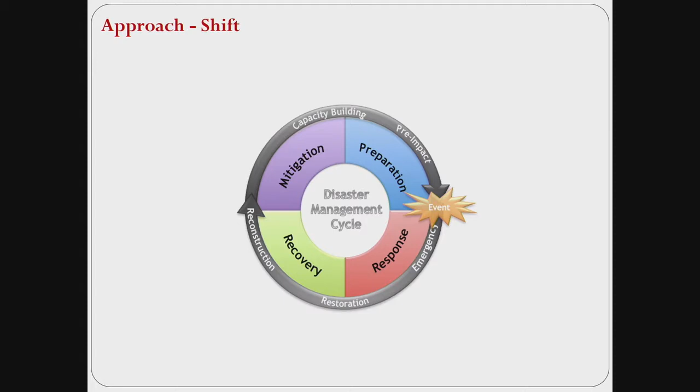Recent approaches to disaster risk management start with mitigation and preparation before an event happens. What can we do to limit the hazard from happening? Can we try to prevent it? Can we try to reduce the magnitude? If not, what mitigation measures may we need to put in place to minimize or lessen the impact from that particular disaster? It could be systems, training, prevention methods, and a whole lot of different tools at our disposal.

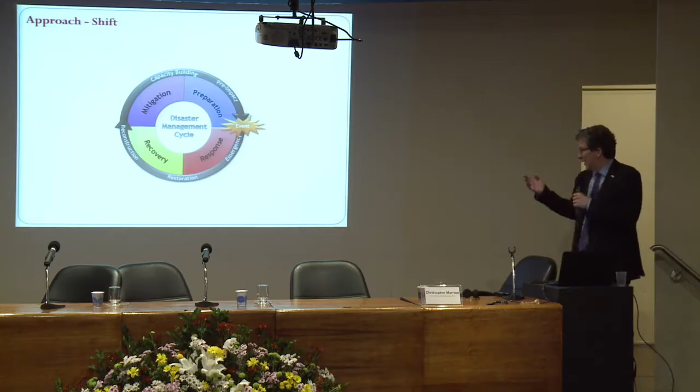We then move forward to having an event, which could be on the order of seconds, minutes, hours, or days. Following that is a response period, where we're looking to fully address the particular event that has happened, and then eventually, once we're finished with the response, we move into recovery and repairing and building back. It's a cyclical, iterative process.

Over the last several years, the industry has been moving more within this diagram. A lot in the past was more on response and recovery. We're now pushing into trying to deal with disasters beforehand, and focusing much more on prevention and mitigation, for many, many reasons.

From there, looking a little bit deeper, we have what we'd call a risk-informed, performance-based approach. It's helping us understand what it is we're trying to achieve, what are the hazards and issues we need to deal with, and then coming up with measures that hopefully allow us to achieve what it is we really want to achieve at the end of the day.

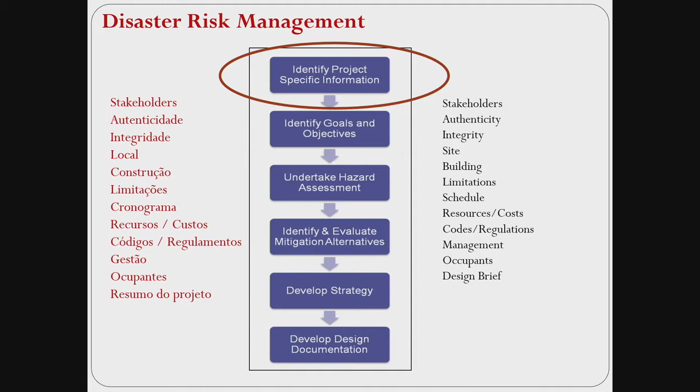Quickly walking through this — you may be familiar with a lot of it — starting out with the project: where we're at, what we're trying to do, who are the stakeholders, what are the different resources, what are our limitations, basically laying the groundwork for the overall project.

The next is our goals and objectives. What are we trying to do? Some are very high level: protecting the life of the occupants, of the people in the building and within the community, protecting the lives of the emergency responders and allowing them to get into the buildings and perform the operations they need to safely.

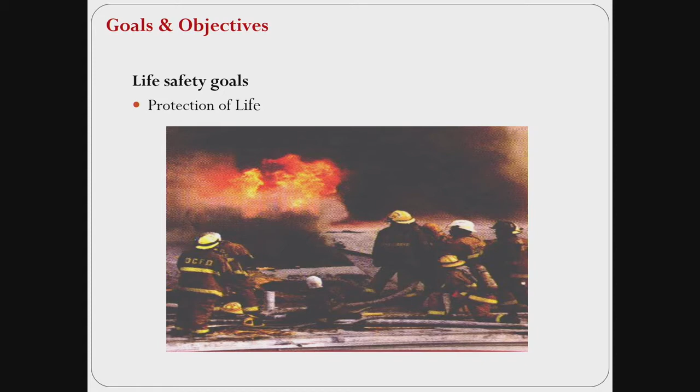But then we also look at other goals and objectives in terms of protecting the heritage, the overall structure, and protecting the contents. It's not just saying we want to protect this and have no damage, because there's obviously a relationship with how much money that would cost to protect it and ensure there's absolutely no damage. So it becomes kind of a balance.

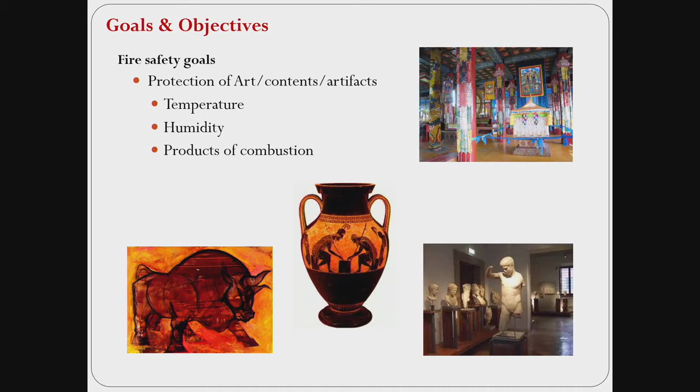It's important to start to quantify some of these things — how much damage, what type of damage is going to be acceptable to us and to the different stakeholders. That may vary. But for instance, just taking art...

Some art may be more susceptible to higher temperatures or humidities for extended periods of time. Some of the products of combustion, things produced during a fire, are acidic, and if they get onto paintings or electronic materials, they can have short-term and long-term impacts.

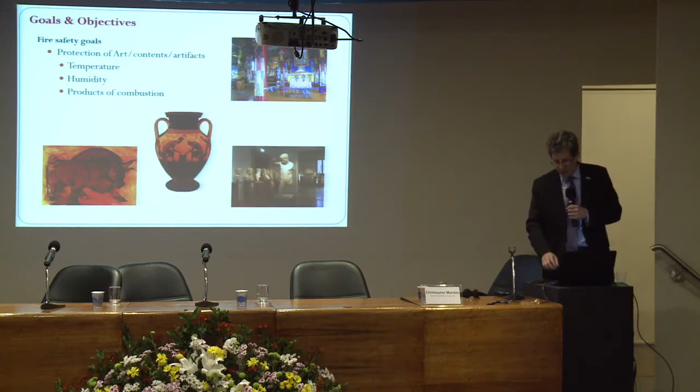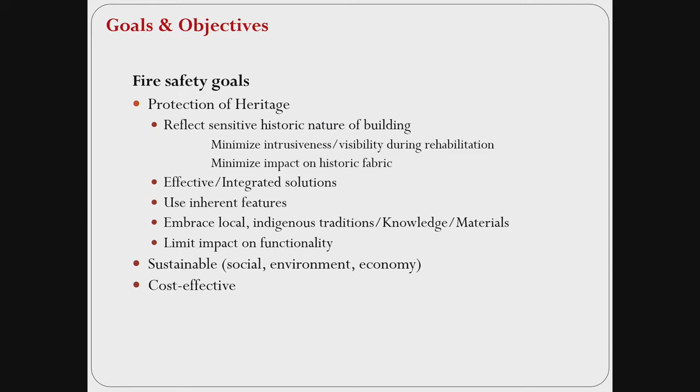So it's just understanding what we're trying to achieve and getting into a little bit more level of detail as we move forward. Then looking at mitigation and prevention measures, to what degree do we want them to impact the structure while they're being installed? What about the aesthetic looks of having smoke detectors in the room? Are there other options so we don't have those obviously sticking out in a very ornate ceiling?

But understanding some of these things are important early on as we go forward. From there, looking at credible events. Is it just fire? Are there other types of disasters and hazards that we need to be dealing with? Sometimes yes, sometimes no. Sometimes we may have earthquakes that then have fires following them, so we may have multiple events that we need to be addressing.

From there, we then look at fires. We talked about statistics earlier, and it's very important to look at and understand where we have been in the past and how that helps inform us going forward. You had seen before some of these showing up in statistics from electrical and open flames and cooking and those types of things.

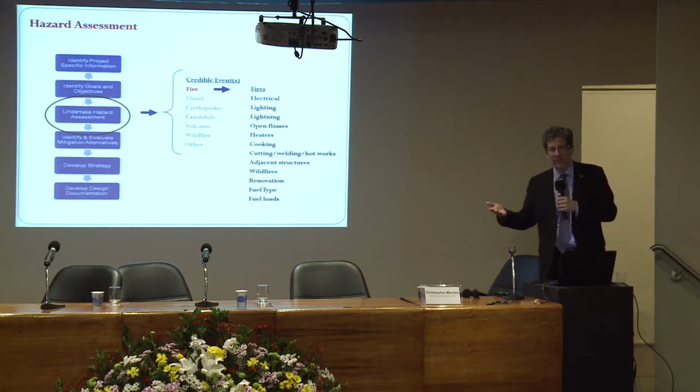But it's going through and understanding what there is in the building. It's not to say we can't have open flames in a church. It's more about understanding what we have, how much of a hazard that is, how do we then go about making that safe if that's what the functionality is and the operation of that facility, how do we go about helping protect it and make it safe?

From there, once we understand what we're trying to do and where we're trying to go, how do we end up getting there and looking at prevention and mitigation measures? This is looking at a balance between a fire and trying to limit it from happening and how big it can grow and how quickly. If we can't make it 100% that we're not going to have a fire, let's try to limit its size, and knowing that we can't have an absolute zero probability, looking at mitigation measures.

We often have a number of different things that we can do to compartment and contain the fire so it doesn't get large. Having detection so that we can alert people and the emergency responders, and so forth. Egress in terms of suppression. So it doesn't mean we need to be doing everything. It's really looking at the individual building and tailoring the solutions to the hazard and what we have as a building on an individual basis.

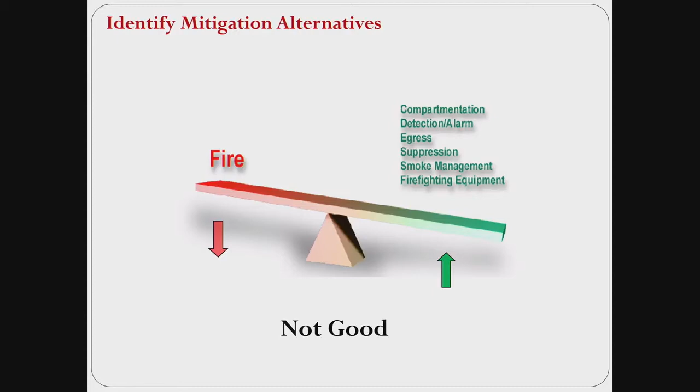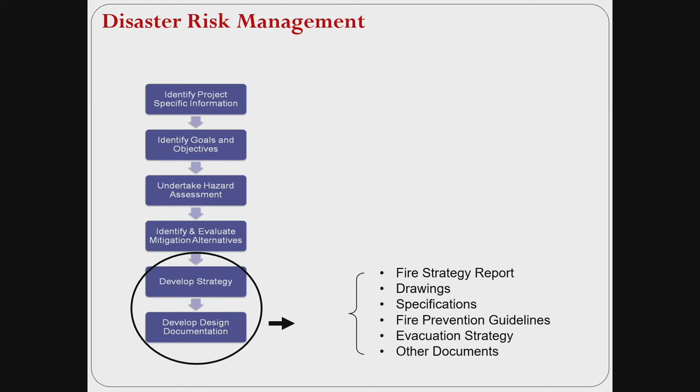So that obviously is good and not so good in terms of having a large fire and not so much protection there. From there, once that is in place, getting into design documents and working with the architects and engineers and local authorities in terms of moving forward and implementing the restoration or construction work.

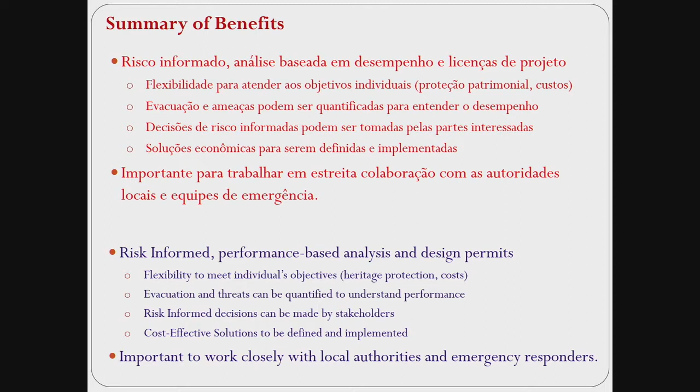There's just a couple of things quickly in terms of this process, in terms of some of the value it brings, is flexibility and being able to hopefully quantify to a better degree are we able to really achieve the objectives that we think we are, and that helps to make decisions that are more informed. Is this really going to work? Should we be spending our money here, or is it going to be better value to put money in other different mitigation measures?

Obviously, helping people be able to get out and understanding different threats, bomb threats, other types of natural disasters, not just fire. Are the evacuation systems able to get people out? And then obviously looking at cost-effective solutions, and with limited resources that we often have, is this the best way to be investing those resources?

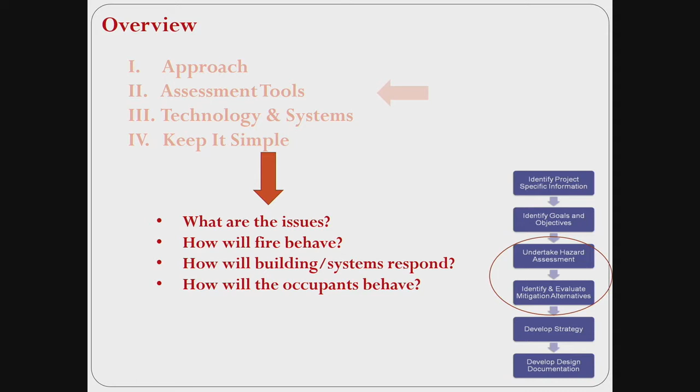Assessment tools. So we have the structure, then looking at what are the issues, how will fire behave, how will the building respond, how will the occupants behave.

So what are we trying to do? A fire starts, what do we need to do? We need to detect it, we need to notify the occupants, we need to notify the emergency responders. They need to respond, and then they can begin to put the fire out.

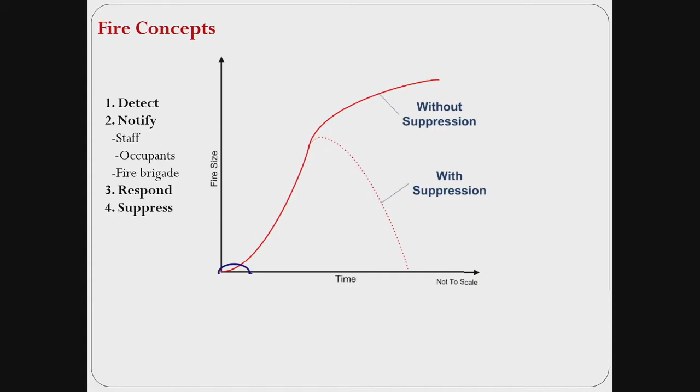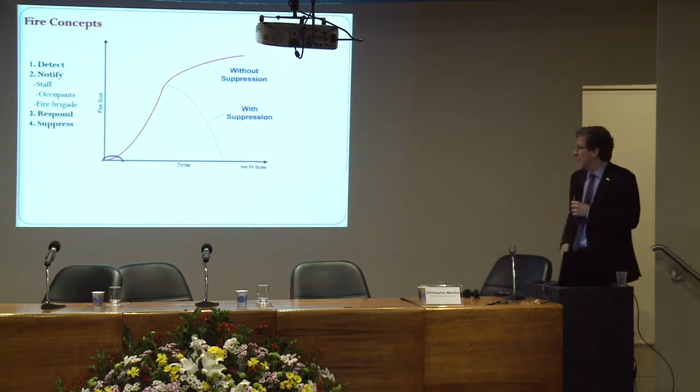But as you can see by how quickly fires grow, every second, every minute really counts, because the fire is growing so rapidly. So the more delay in terms of not having any kind of detection system, if we're not then processing that signal and sending it to the fire department very early on, if they have trouble in traffic getting to the site, if there's a gate around our facility, if there's locks, you can see that time continues and the fire grows and doesn't wait for the fire service to get there and to start putting water on the fire.

So everything we can do, just keep in mind, it's very time-based. Are we reducing that time frame, or are we allowing that to potentially increase? And how can we help enhance that reduction?

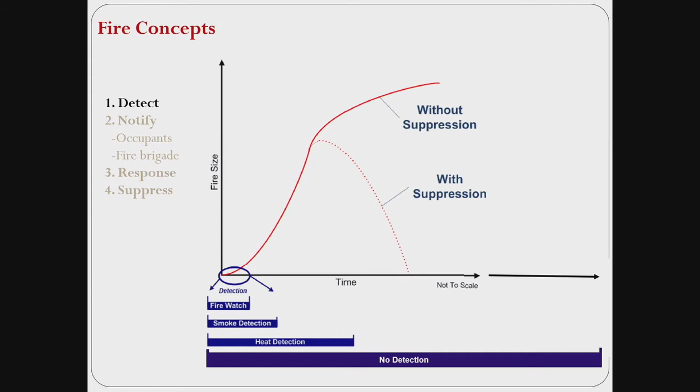Putting in different types of detection systems, from having a human there to see it, to smell it, obviously very good, but quite expensive. Putting in smoke detectors are better than heat detectors, and you can see, obviously, smaller size fires can be detected by those means.

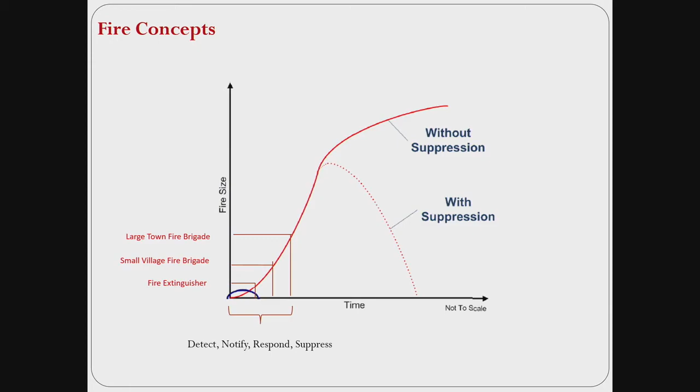One of the other things I thought is important too, just to understand in developing strategies, is that fire is based on physics and science. We're producing heat, and then you put water on the fire, and the water is actually absorbing the heat. So the more heat you absorb, the fire gets smaller and eventually extinguishes, which means, again going back to physics, if you have so much heat being produced, there's a quantity of water that will put that out, as long as it's effectively applied into the fire.

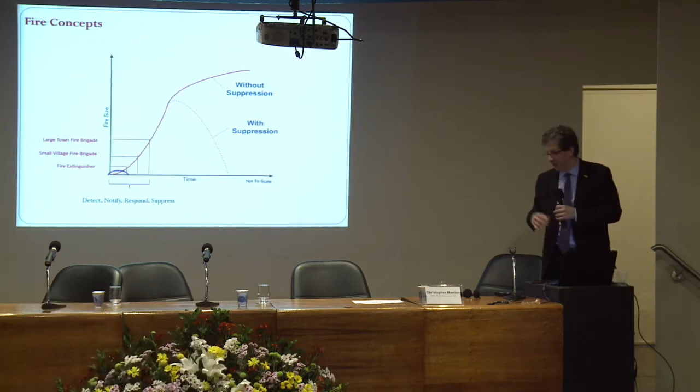But then looking at this, if you have a small fire extinguisher, it's a relatively small fire you can put out. If it's a small rural town with a limited fire department, that could get a little bit larger fire, and then getting into more of a city context, you can get even a larger fire from there.

There's a lot of work going on in terms of new technology, in terms of looking at human behavior and how people respond during emergencies. It's important to understand. We heard earlier today about different extinguishing agents. There's been reports out looking at different extinguishing agents on different types of materials. It's very interesting to note.

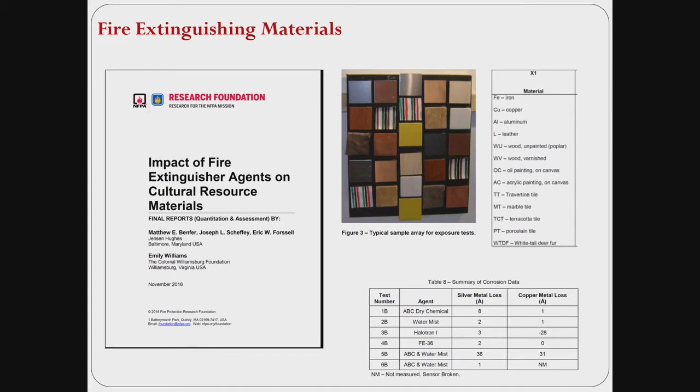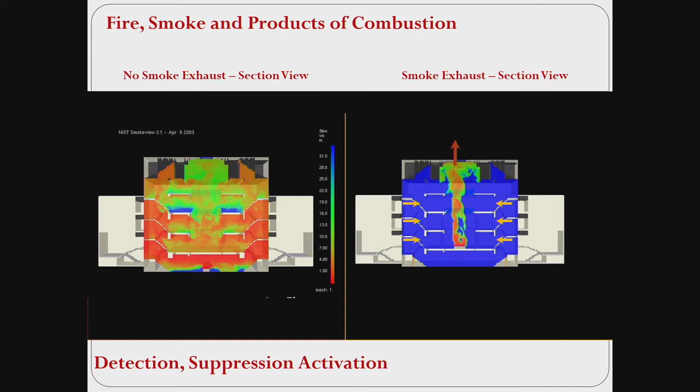A lot is happening in terms of computer modeling, looking at evacuating and how long it takes people to get out, looking at where we may have congestion. Looking at fire and smoke behavior and how that grows and develops, and if we have mitigation measures, how that may impact the movement of fire and smoke, and being able to predict when detectors may operate or when sprinklers may operate. Looking at the behavior of structures in fire and how long the building may stand or types of damage that may happen.

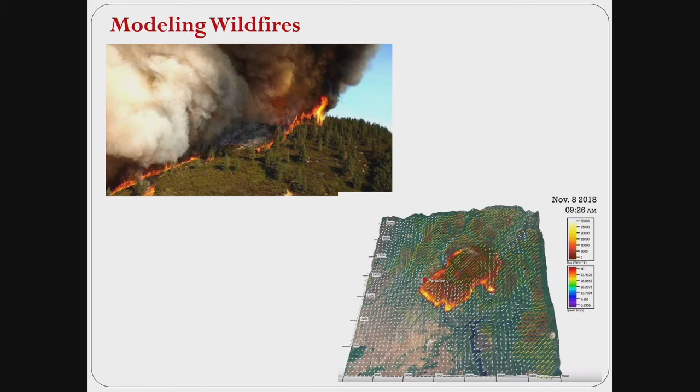Also just using satellite technology and being able to take that and look more, not just at structures, but wildlands and sites, looking at fires using that, and again getting early detection for areas out in the middle of wildlands that may not go detected for some time.

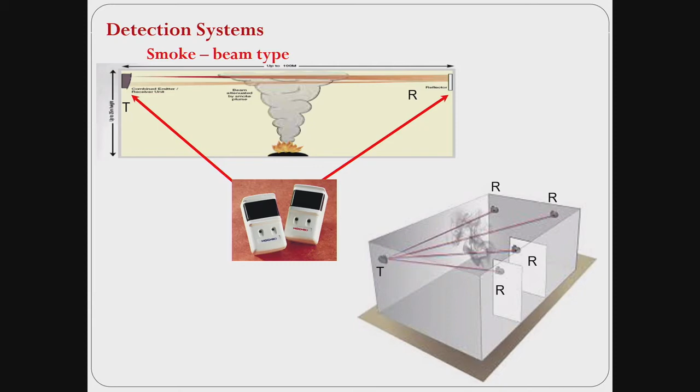Detection, quickly, some new technologies: just looking at wireless systems, so we're not running wires and impacting a lot of ornate ceilings. Beam smoke detectors are great, since we can span long spaces, and there's some new technology with that.

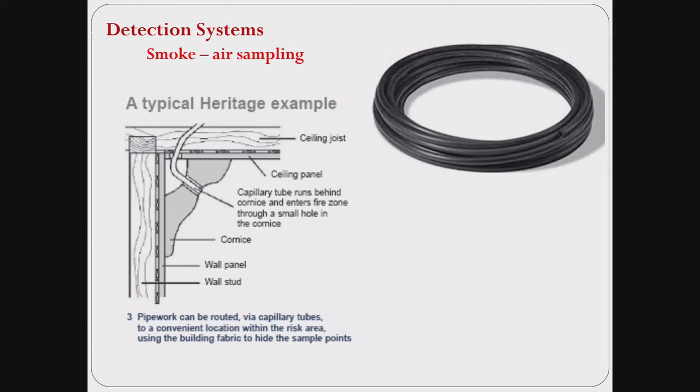With some of the air sampling systems you may have heard of, again, these things are very good, very sensitive, but are fairly well hidden behind some of the ceilings, and there's some new technology and recent developments using much smaller tubing to hide it that much more effectively and be able to detect more specifically where that fire is, so that you don't go into an area and try to search for an extended period of time.

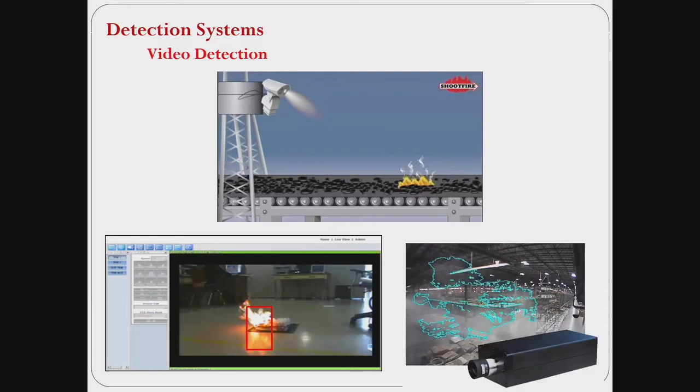Using video and combining security and video detection for looking at fires and trying to detect it from a video means. Again, a lot happening with connecting your fire alarm panel to mobile devices.

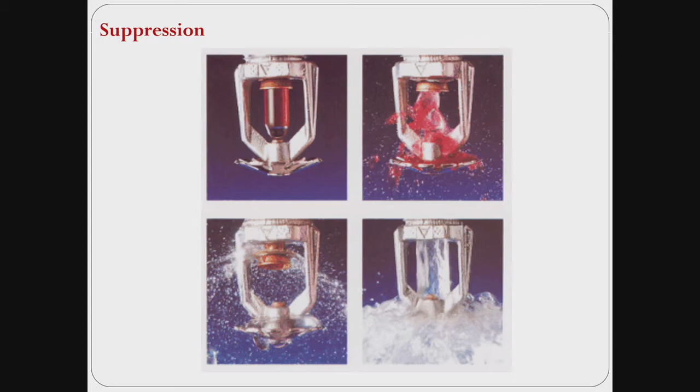Sprinklers, just to talk for a moment, I know there was a question about jumping to the results of that. I don't know if Jose is here. Do you want me to talk about this, or? Okay.

Sprinklers are a great asset to have in terms of protecting any building, but especially historic buildings. We see in movies, in Hollywood, that they have had a very negative impact on our belief in how they operate. Sprinklers often have a glass bulb that at 75 degrees centigrade, the liquid expands and the bulb releases, so just the sprinkler close to the vicinity of where the fire is releases and you get water. Not all of the sprinklers go off.

If you blow out the candles on your birthday cake, they're not all going to go off. If you pull a manual pull station, they don't all go off. It's just the ones in direct vicinity of where the heat is, and you usually might get one, two, or three sprinklers that discharge during a typical fire.

People get worried about water. What do you have running through buildings? Lots of plumbing pipes, hot water, cold water, sanitary, drainage, but everybody worries about sprinklers and sprinkler water, and nobody thinks about the hot and cold water. At least we monitor the fire alarm system if there's water flowing, but your hot water, if you get a leak in the middle of the night, you're not going to know until somebody shows up the next morning.

These are pressure tested, all kinds of fantastic things, and in terms of reducing water damage, keep in mind sprinklers are about 80 liters per minute versus the fire department at 500 to 700 liters per minute. So they're going to show up and put a lot more water on fires. With sprinklers, you have one, two, or three sprinklers going for a little bit of time.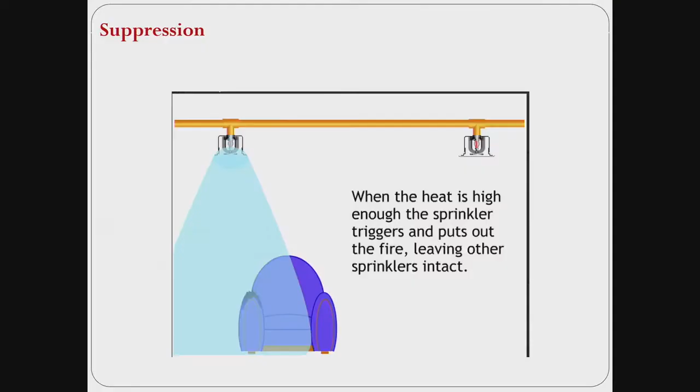So, that I will continue on my public service announcement.

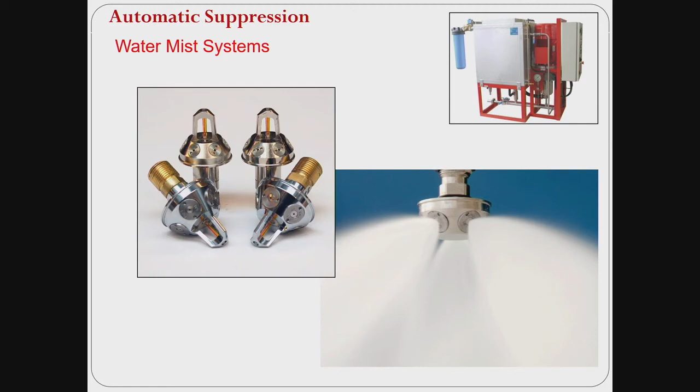Water mist systems, again, very high pressure, very good. They do a lot in Norway and Sweden with protecting the old wooden churches. It's a very fine mist, high pressure, and very efficient. You create a lot of surface area on the small water droplets that is very efficient at absorbing heat. So not the newest technology, but being applied much more now.

We did the attic at St. Patrick's Cathedral in New York with one of these systems. Oftentimes they're self-contained and don't need a lot of water, so for remote areas, there's a lot of benefit.

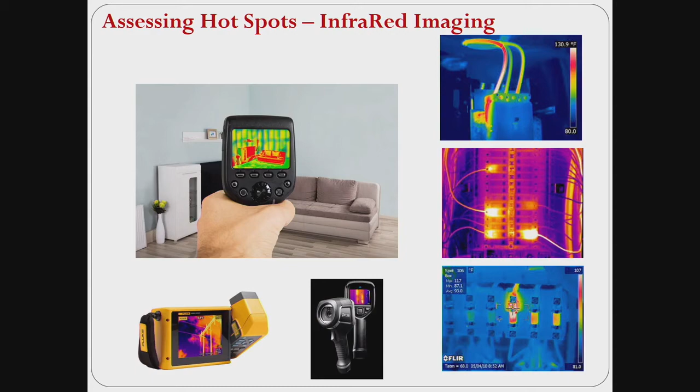Other tools, in recent times, people ask a lot about electrical wiring, and there are things that might be done, getting in electrical contractors, but also looking at infrared to see where wiring and junction boxes may be getting hot, and understanding where a problem may be occurring.

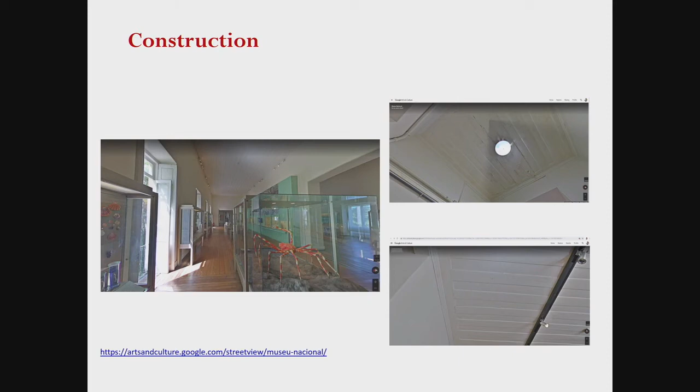Also interesting, looking at the internet in terms of information now available on all the buildings out there. This is from Google Arts and Culture on the National Museum. I think they're trying to crowdsource photographs, but from our perspective it helps understand some of the different construction—seeing there was a wood ceiling and wooden floors, looking at the exhibits and the type of materials, and understanding from a remote perspective what was in there, looking at compartmentation and doors. You can see a lot of fire extinguishers throughout the whole place. Smoke detectors are a little difficult to see here.

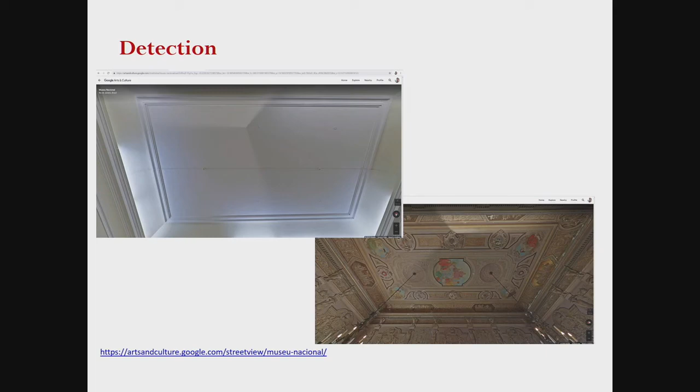One of the other things, in terms of technology, is helping with training and people being able to use fire extinguishers.

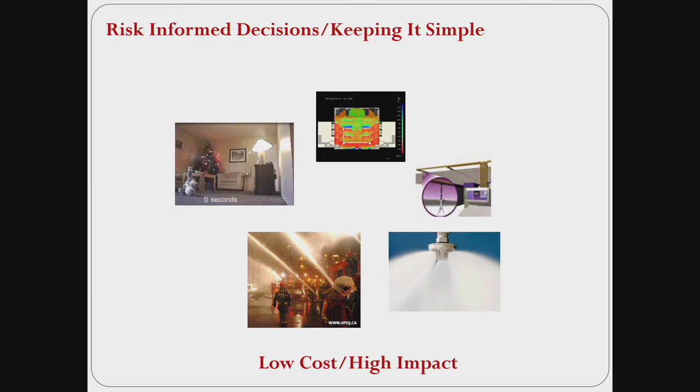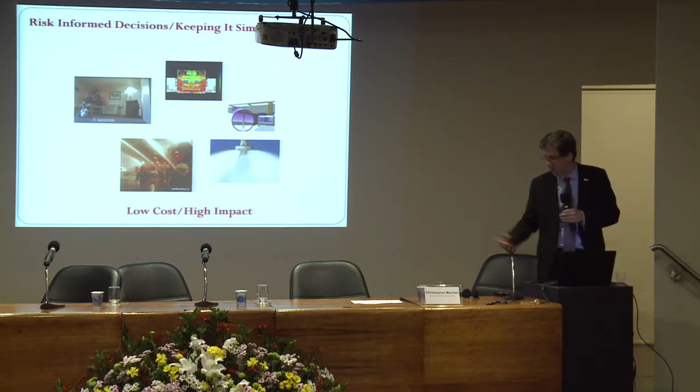The last thing was just looking at the approaches and some of the technology. But I think in terms of solving and addressing a lot of these issues, it doesn't necessarily mean all of the latest technology and equipment needs to be applied. It's great to know that they're there, but it may not always be relevant to run computer models or use the latest equipment.

Or, what do we do if we don't have a large fire department? When you start to look at statistics and reports of what happens in fires, especially in historic properties and cultural heritage facilities, there's a lot of very common themes that continue to happen. It's usually not just one thing—it's a lot of things that line up for the perfect storm.

There's a lot of ignition sources, a lot of combustible materials. There's typically no detection, no alarm or notification to emergency responders, limited or no suppression systems, limited compartmentation to limit the fire from growing vertically and horizontally, and limited plans and procedures in place. These are the 10 or so things that we continue to see.

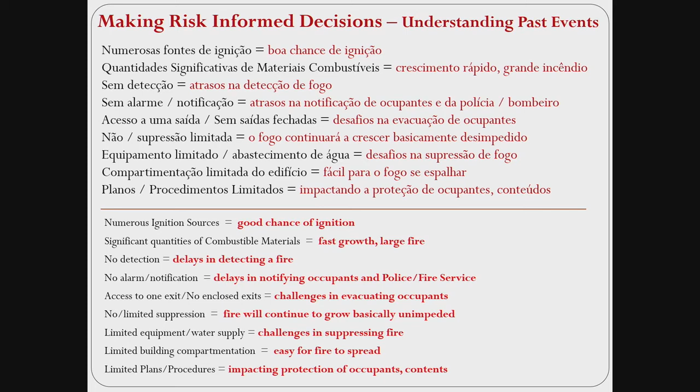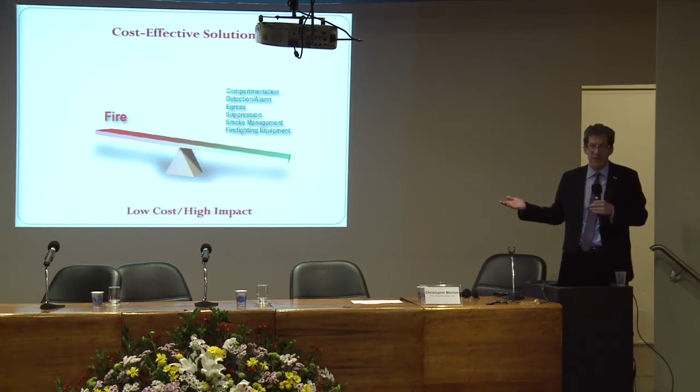Knowing that then helps us feed into looking at strategies and what can be done. Going back again, it doesn't necessarily mean we need the latest sprinkler system or the latest fire alarm system—it's fantastic if we can, but resources are limited. There are things I wanted to end this with: it's not always the latest and greatest technology.

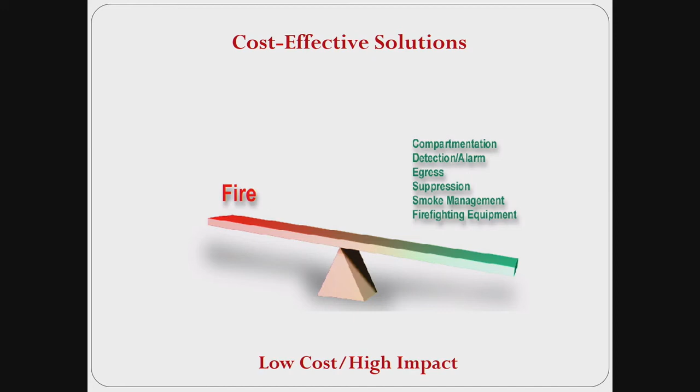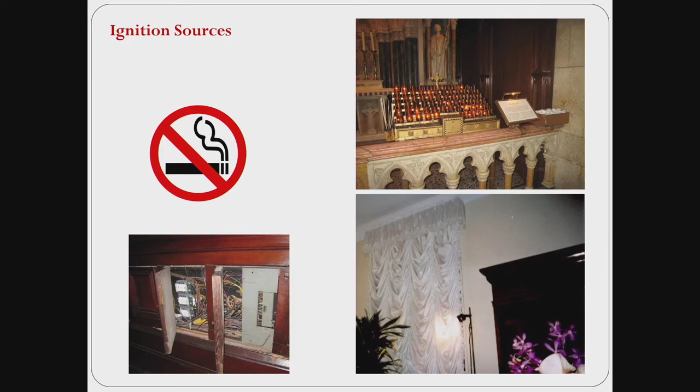There are a lot of things we can do today that are low cost but have a very substantial impact on safety. A lot of this is just common sense when we think through it—no smoking, and if we have candles, keep them away from things that can burn in case they tip over.

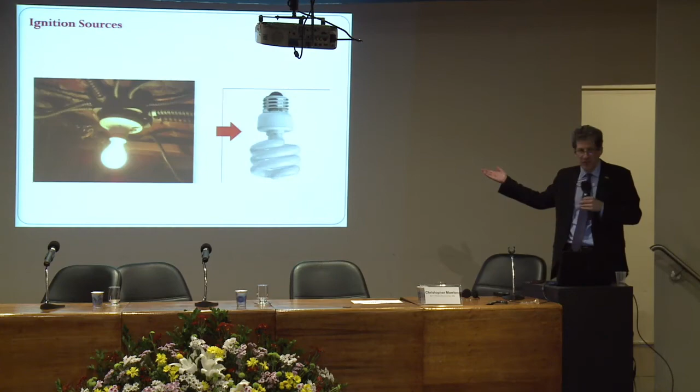We heard earlier about Windsor Castle and having a halogen light up against a curtain. These things we know—don't put hot things next to things that can burn. Let's keep them separated. Upgrade our electrical if we can. Simple things, like changing out light bulbs from halogen or incandescent to LED or CFL lights, can make a significant difference in reducing that risk.

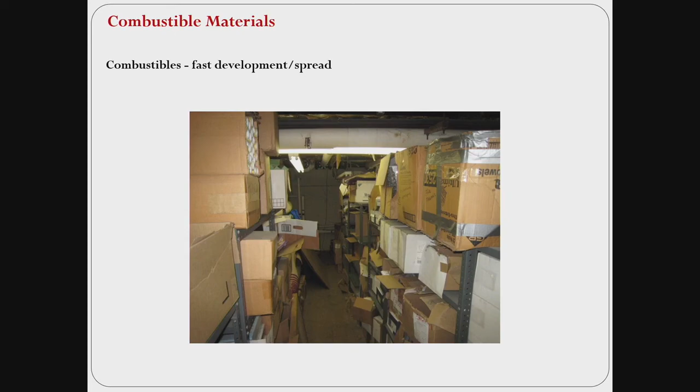What happens in attics and basements over the years, decades, centuries? We get huge accumulations of rubbish, whether up in attics or down in basements, while our artwork sits elsewhere. The hazard is down below, which I think we heard before—it's not typically in the gallery spaces, from what Jose was saying.

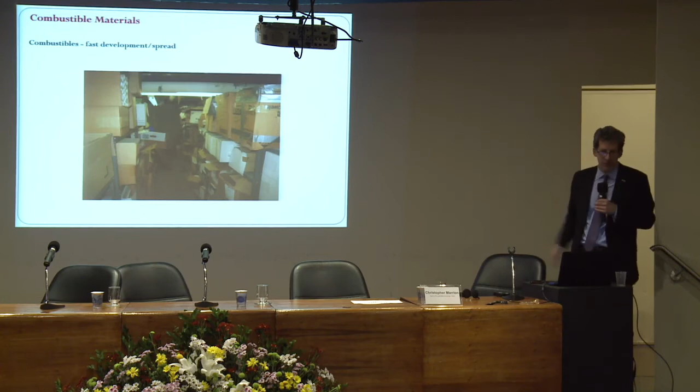Does all of this need to be here? Can we remove it? Can we store it at some other site? Does this cost us a lot of money, but what impact does it then have on us?

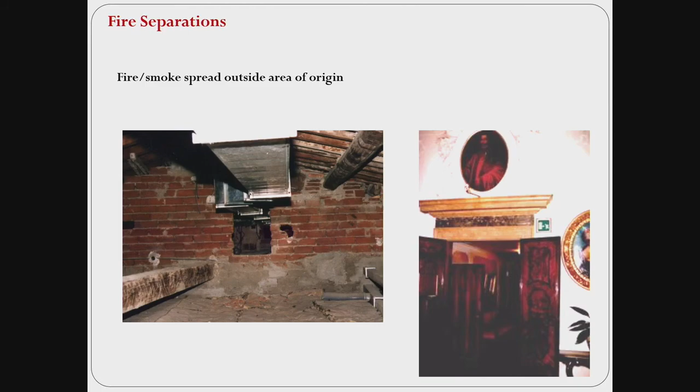Fire separations—we put in electrical equipment, HVAC, mechanical equipment, and we have very large penetrations. These walls at one time were likely there to help contain a fire and provide fire separations. Now when we remove them, the fire is going to pass right through. Windsor Castle, I think, involved 100 rooms, and anything we can do in terms of compartmenting to limit the spread helps keep that fire small, so the fire department can do its job.

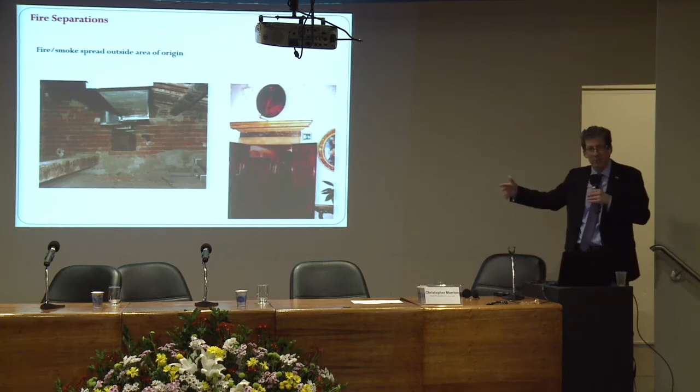But passing that, having doors that we keep closed or on self-closers—these things don't cost a lot of money but have significant impacts.

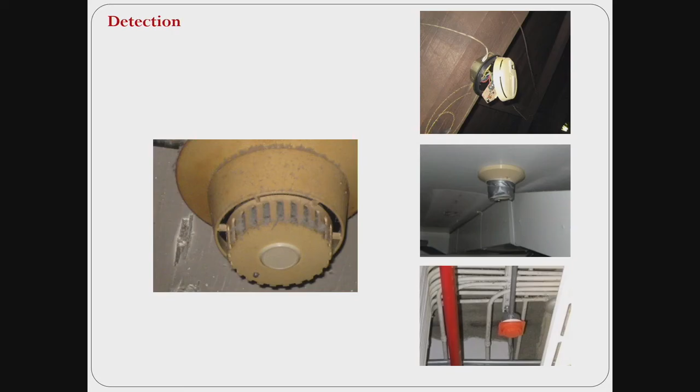If we have systems, we talked a lot about maintenance, and you can see there's probably none of these detectors are working. It's great, we have smoke detection, but is it really going to work at the end of the day, and has it been tested? But again, very, very important points.

Simple things. This was a monastery in the middle of Mongolia. They're sending a monk up to the 3rd floor during a fire to ring a bell, which is great in terms of everybody else being alerted, but the person going up to the 3rd floor—so why not just put a rope down to the ground level so somebody from the ground can begin to notify.

Again, sending a signal, not just that it goes off at the fire alarm panel in the middle of the night and nobody is there to call the fire department. Can we connect it? Again, not a lot of money, but so that we're calling the fire department once the panel goes into alarm 24 hours a day.

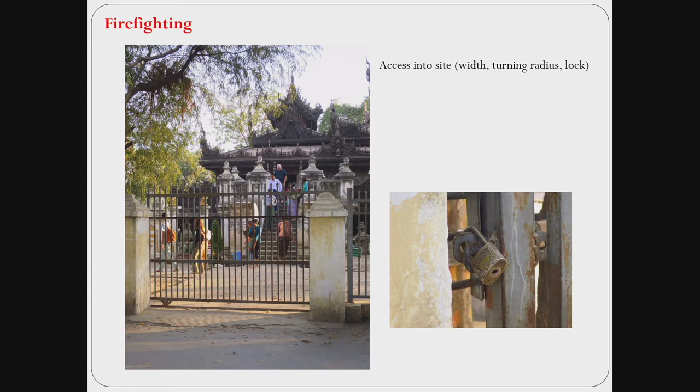One of the last things is just, again, looking at can we get the fire department close to the building? Can they get through the gate? Are there locks? Do they have keys? And I think this was mentioned earlier today. Again, this is not costing anything, but seconds and minutes are going to be spent getting the vehicles, getting the people in there to begin fighting the fire.

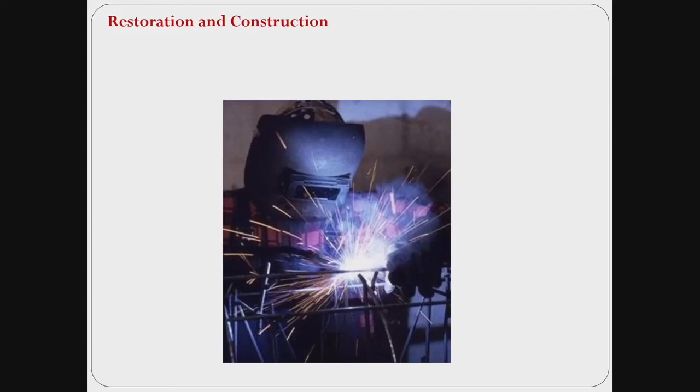One of the last big things is we've seen in Paris, restoration—and this is a whole other topic—but again, we have strategies when the building is fine and operational, but we really need fire strategies for what's happening during that restoration period. It is a very hazardous time, a very critical time in the life of a building.

You have a lot of hazardous things going on, cutting and welding. You're introducing a lot of potentially combustible materials. You removed doors potentially to go have them restored. You put up fencing for security. Now the fire department can't maybe get to the site and get up to the upper floors readily. So there's a lot of things where the overall level of safety there may be diminished and we introduce hazards.

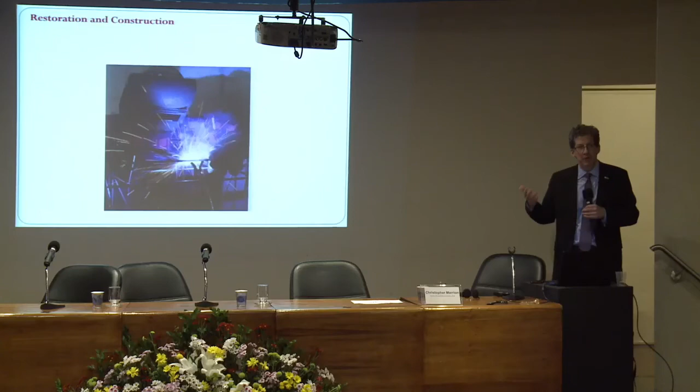But it's really looking at these very closely during that time and having very specific plans, and also working with the people that are on site doing the work, creating awareness and training and continually working with them. They're the biggest ones that are going to help. They're the biggest ones that are probably potentially going to start something. So how do we help create awareness and work with them and train them to limit these types of things from happening?

And one of the last things is just looking at engaging the overall community, emergency responders, the people that occupy the building, the people that run it. It's all a community. We're all impacting the solutions and problems from different perspectives.

And just to end, it's about keeping things simple. Again, the approaches are the same—it's just how can we go about implementing that with the resources that we have. So it's great to be working in towns and cities where we are able to install all kinds of equipment, where we have a fire department or a fire brigade that can respond.

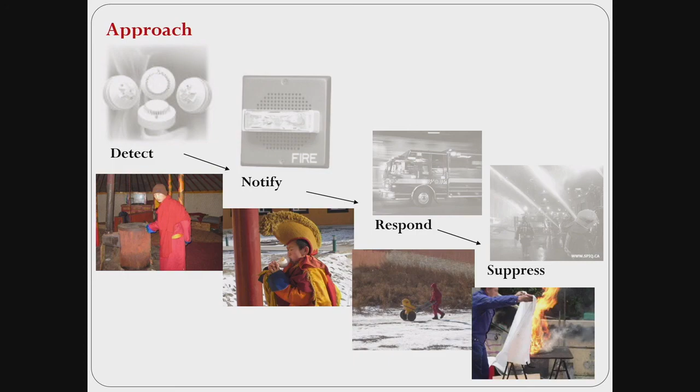But what happens to some of our cultural heritage and sites that are out in very, very remote areas where we don't have these? Again, it's just looking at what resources we have available that are going to be long-term sustainable—to put in fire alarm systems in some of these remote areas where there's nobody to test and maintain, to put in sprinklers where it gets to be negative 40 degrees centigrade in the middle of winter time, where there's nobody to maintain and service those. Is that really a long-term, sustainable, useful means in terms of the resources we may have?

And again, this was looking at having some of the younger monks in this particular monastery be kind of the detection system for an hour or two a day, using the conch shell that they were using to call in people for meditations, that they were very tuned into hearing and listening and understanding. Whatever response they could, even if it was using wool blankets, if they could at least try to limit the fire or keep small fires from growing larger, fine. Obviously, if it was getting much bigger, then get out. There's limitations in many ways, but there's some things that can be done at least to try to reduce the probability of some of these happening.